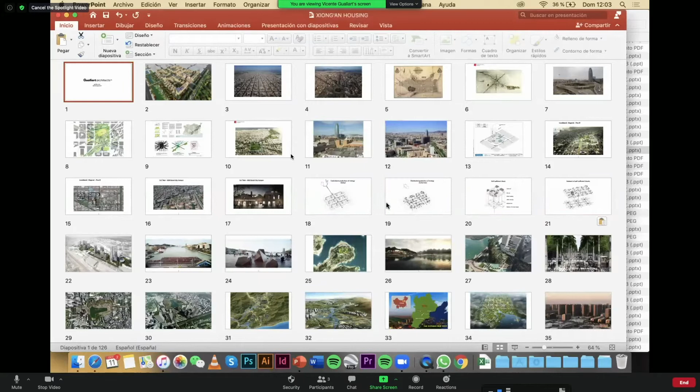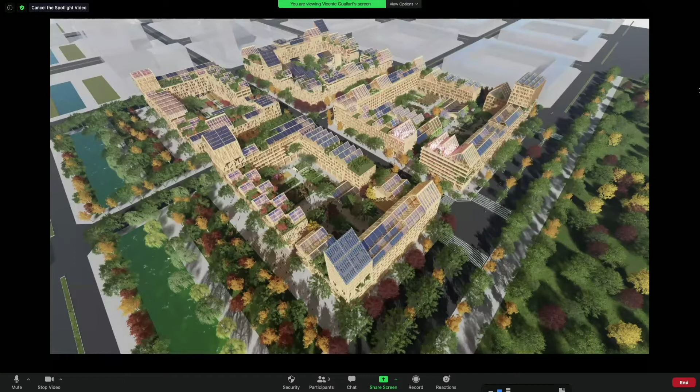Okay, so I will start with my presentation. My name is Vicente Guallart. I am the founder of Guallart Architects, and recently we won a competition in China in order to develop self-sufficient housing. I have been working in China in the last year in several projects, and I would like to do a short introduction to explain how this idea of this project came about, because this project is not something that just appeared because of the pandemic and the different conditions, but we have been working for a long time developing these kind of ideas.

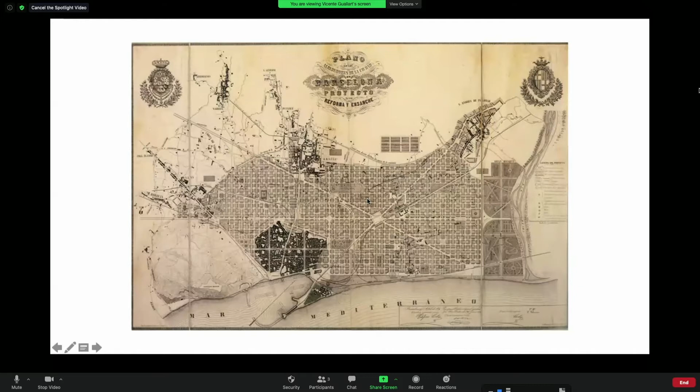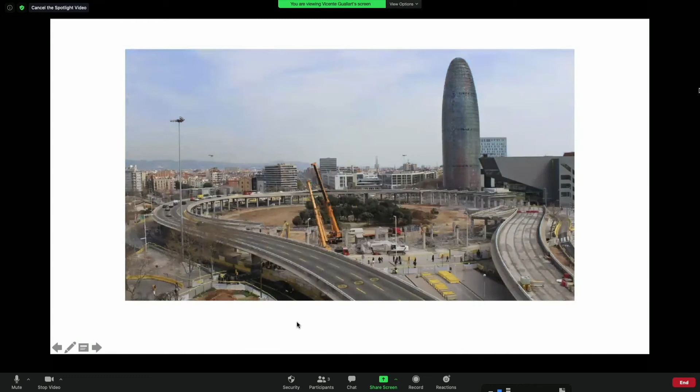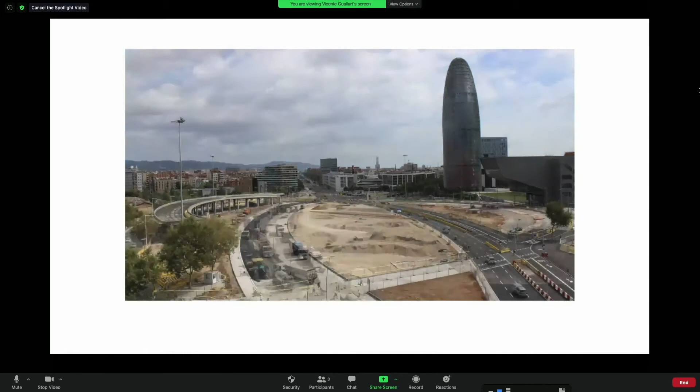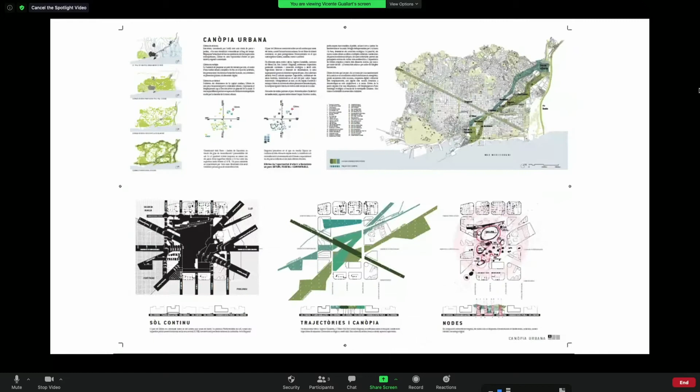The first thing I would like to share is that I was chief architect of the city of Barcelona for four years. During this period we were working on doing an upgrade of the city and developing what we call the renaturalization. For example, we had still some infrastructures from the end of the 20th century, like highways even in the city center, that are displaced in the city. Part of my work was to define new ecological principles for it. But more than this, we were literally demolishing some of these infrastructures from the late 20th century. So that means we know we live in a world that needs to finish the process of urbanization from the modern times, with the idea of the city for the car and so on. In places like Barcelona, in my previous work, we invested a huge amount of effort to do real, specific projects, like demolishing a highway and placing a park in the city center.

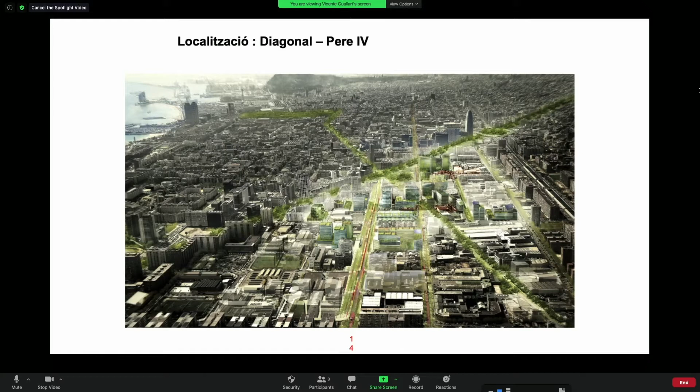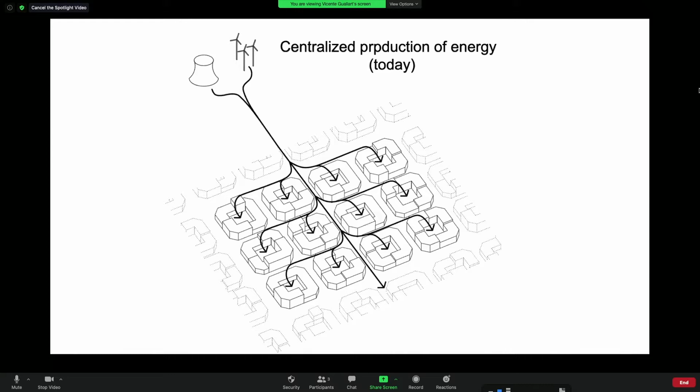Other projects we were doing were related to the new technological district called 22@, creating new campuses where we could merge information technology with new ecological principles. As part of my work, I was proposing this idea, in fact 10 years ago, that today we live in a world where we receive products from outside the city and consume them in the city. So we still have this centralized production system for energy, but also food and so many things. The city of the future should be something different.

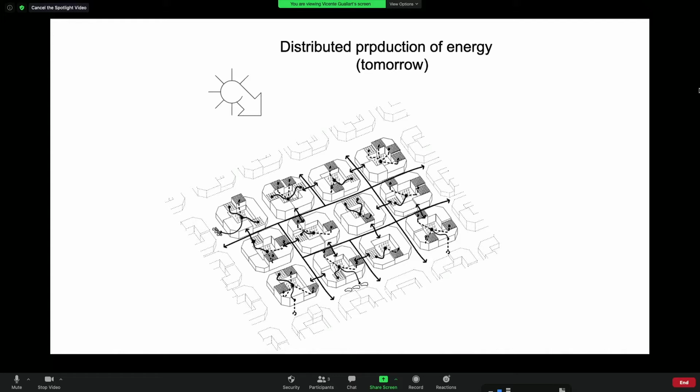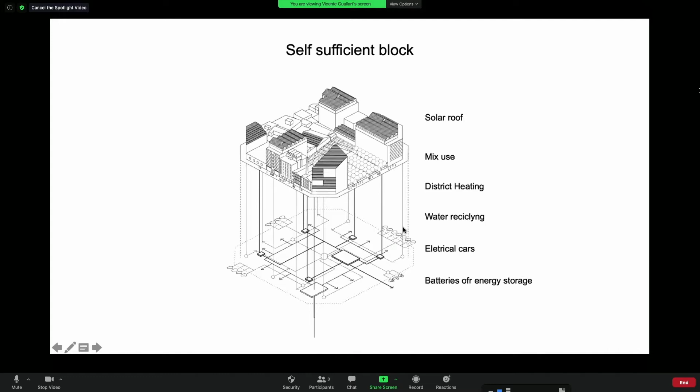The city of the future should produce their own energy. Right now, with the new statement from the European Commission that by 2050 Europe should be a zero emissions continent, the first place where we should start this process is the cities themselves. So we need to transform our cities. This is the first drawing: 10 years ago we were starting to plan greenhouses on top of existing buildings in the city, charging electrical cars with the energy produced by solar panels, and introducing this new layer of data and metabolic systems in parallel to the physical structure of our cities.

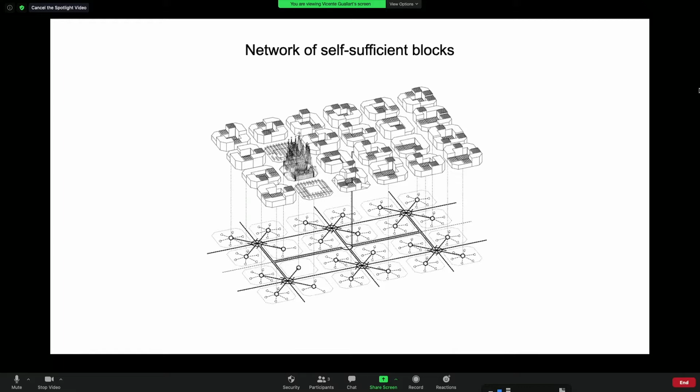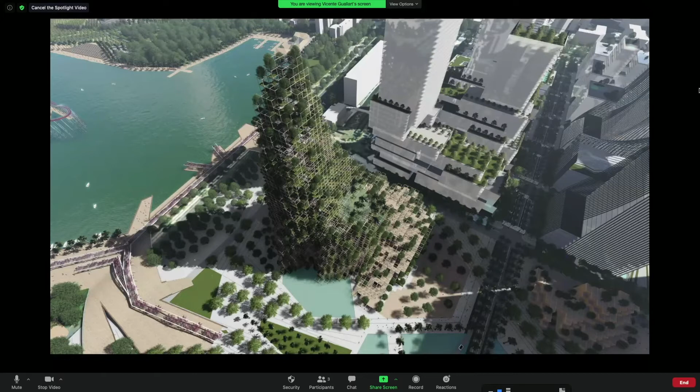This one I won two years ago, a competition in Shenzhen, trying to introduce new ecological principles, but in this case at the urban scale, with a much bigger scale. In this case in Shenzhen it was more about a new CBD, a central business district.

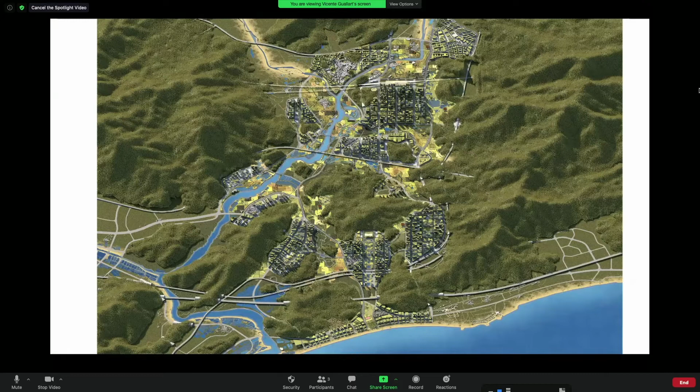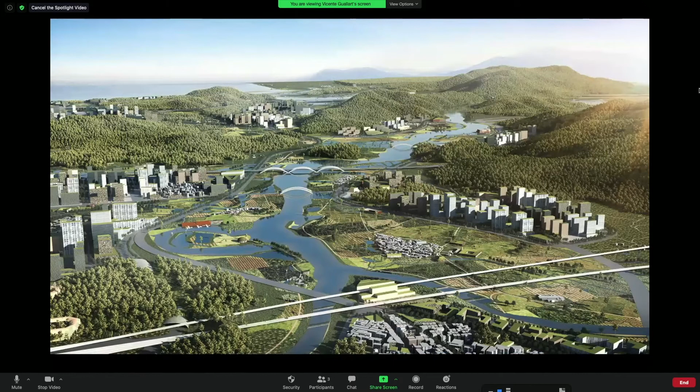In China, they are still in a huge process of urbanization. This is another competition where we won second prize, creating a new district in Shenzhen for 1.5 million people. We proposed very dense areas in the territory, along with a lot of green areas, using the river as an element that could structure the territory.

I already had some experience in China, but we knew in January that the Chinese government was launching a new competition because they are building a new city in Xiong'an. This is south of Beijing, about 100 kilometers south, and they want to create a kind of economic triangle with Tianjin, the harbor of Beijing, the capital, and this new district that should allow them to decentralize some services from the city.

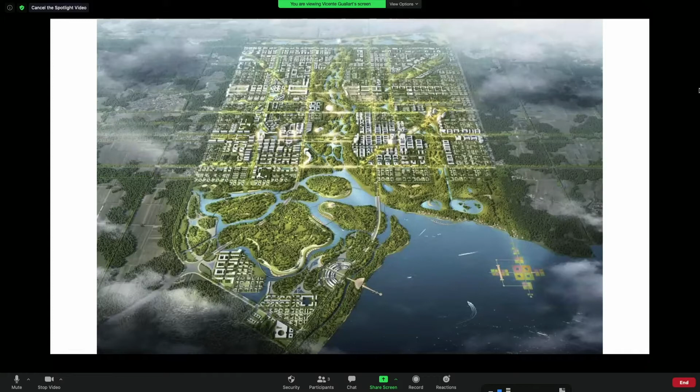They are still following the principles of modern urban planning, where we have residential neighborhoods, industrial areas, and office neighborhoods. That means people are always moving from one side of the city to the other, because the principles of modern planning were based on this idea of specialization and urban segregation.

In Xiong'an, they were proposing an urbanism more like the European style, or European systems, with a compact and dense grid, in this case with a lot of green space, but also including mixed-use principles in this development.

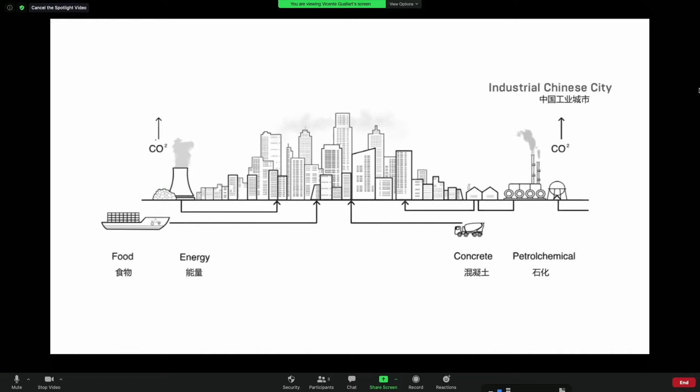I think we are really at the very end, or should be at the very end, of this industrial city model. The new ecological principles for new cities should relate to the idea of biocities - cities that promote life, that build continuity with nature, that produce food in or around the city, that absorb CO2 instead of emitting it, and that use wood as an important construction material, because with forest management you can use wood as material for construction.

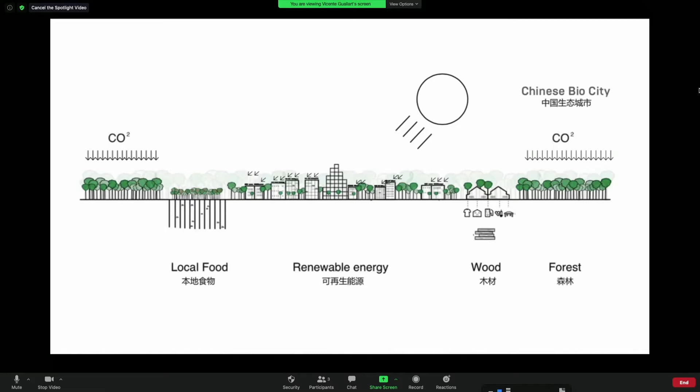These are some principles we have been working with in recent years. Another important principle we use in our projects is moving from this large-scale centralized model to a distributed model.

The centralized model is well represented in a city like Moscow, but also Paris, where there is a very rich center and poorer suburbs - la banlieue - with some social segregation between the center and the periphery.

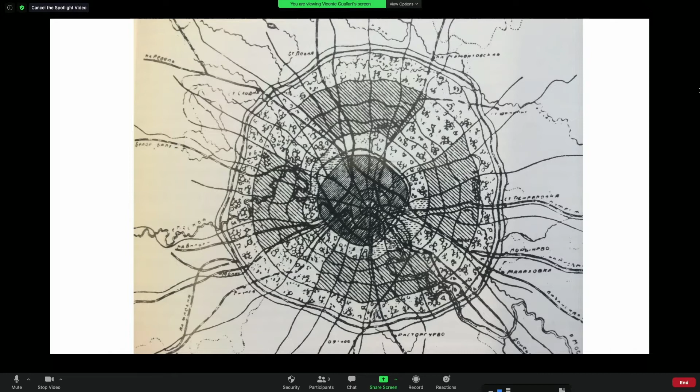The model we have been working on in Barcelona is this distributed model, where instead of thinking of the city as one big element that keeps growing and growing, the city is organized by a group of cells, each one kilometer in diameter.

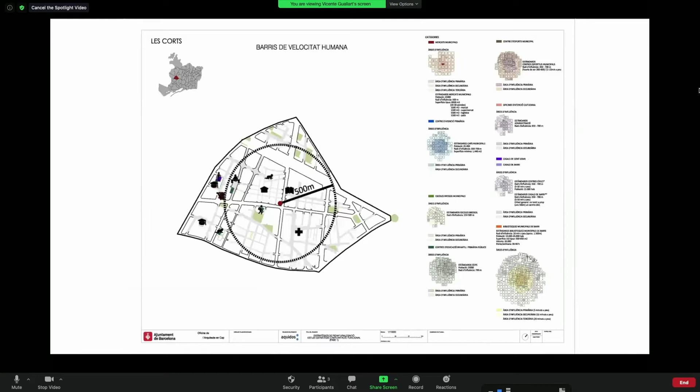This is the diagram with the 500 meter radius model, where people should find all activities connected with public facilities like markets, health, and education. Recently the city of Paris also launched a program called the City of 15 Minutes, with the same idea - having neighborhoods where you can find all these activities inside them.

About mixed use in China, I'd like to explain that they only make housing yellow - for the Chinese, housing means family housing looking south. So all housing in China is oriented north-south.

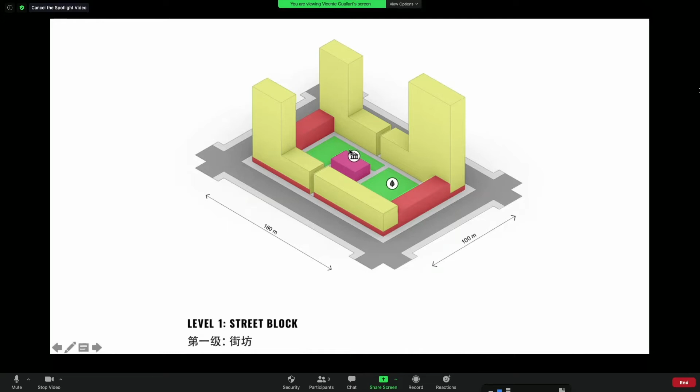That's why for them, when they have a square or rectangular block, it means on the east-west side they can have offices, hotels, or student residences, but they will never build family housing facing east-west. So the block, different from Europe, has to develop mixed use by introducing, for example, public facilities in the center of the block.

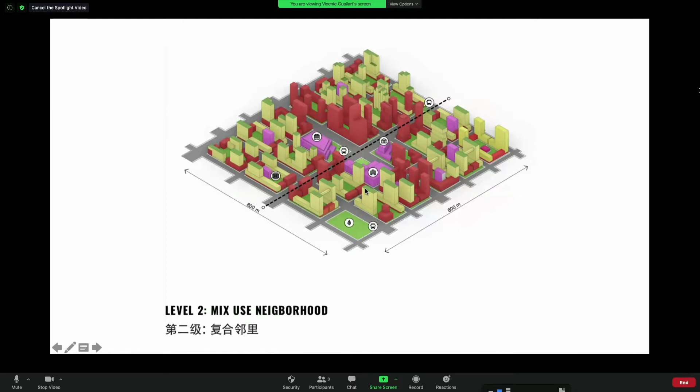They also play with the idea of scalability - if you have a block like this, you can develop a mixed-use neighborhood, and you can develop an urban district also like this. So if you are able to do one block that is mixed-use, you can do the whole district like mixed-use.

Now I will go directly to the block, to the competition that we did. The government launched 6 simultaneous competitions about different topics for this new city: one related to office buildings, another to public facilities, and another to housing. That's why we chose to work with housing, and they offered us 4 blocks with this orientation, north-south.

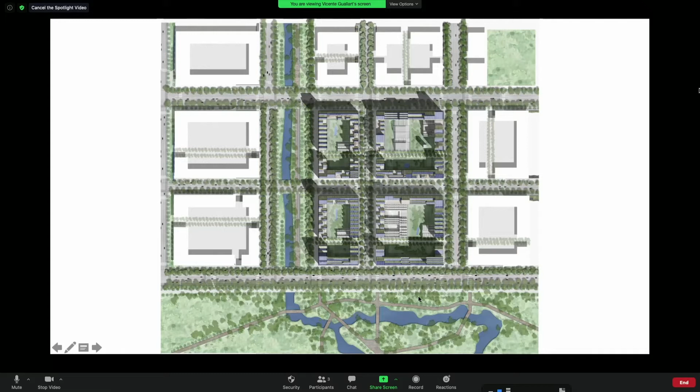Our first idea was to think about how people live, not only in their home, but at least 3 scales: the home, the building, and the neighborhood. Citizens don't live only in our apartment, but we have a relation with the building and the neighborhood. Thinking on these mixed-use functions, and also the pandemic situation or potential future crises, we thought we should organize very clearly these 3 scales.

In fact, we were developing this competition during lockdown. We were in China in February when they started lockdown in mid-February. In Europe, we started lockdown in mid-March. In Spain, we had a very strong lockdown for 2 months from March to mid-May. So we were experiencing this situation of living in lockdown while thinking about how cities in the future should be.

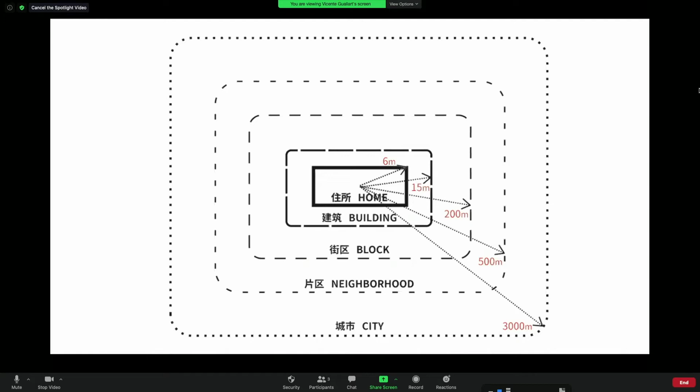Our proposal was based on the principle that we should mix 3 different typologies of buildings: one being the European compact and square blocks, another the high density towers you find in China, and the third - wanting to produce things in the city itself - we introduced greenhouses as part of the design.

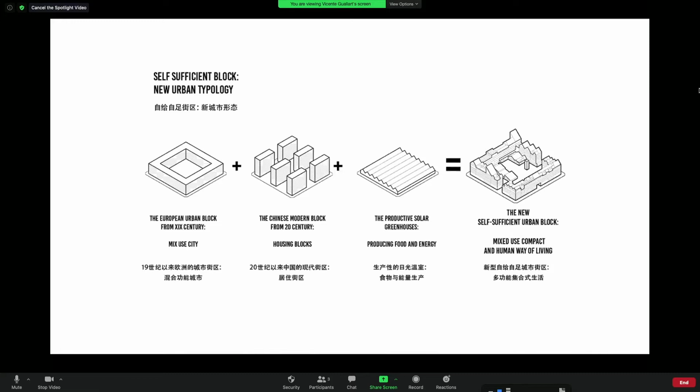The result was a city with a profile that is not like Paris or the center of Barcelona, where there is control of building height. We wanted a broken height system, and at the same time, we wanted all the roofs covered with solar panels, and almost all roofs covered with greenhouses.

This is the result of the 4 blocks, where there were also some courtyards with public facilities. They were asking for a kindergarten, a fireman station, a government center, a small center, and we included a swimming pool and other public services.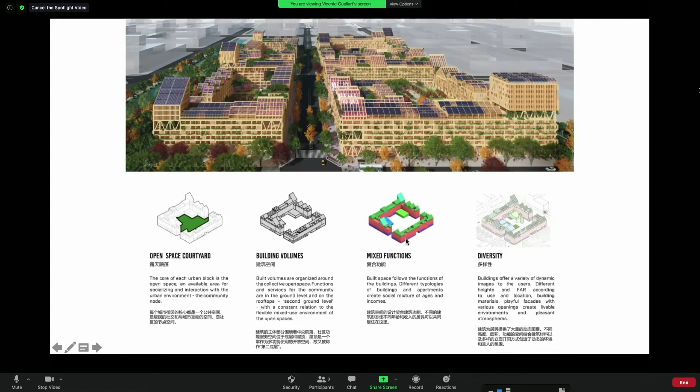That's why we were defining this mixed use, happening both in plan and in section. The first thing was related to slow mobility, the idea that people should be able to walk. In this model of the 15-minute city, the idea is that we should walk to work, walk to buy food or go to other places we need daily.

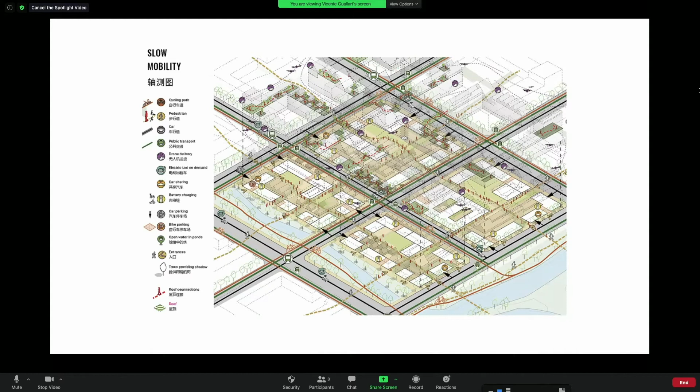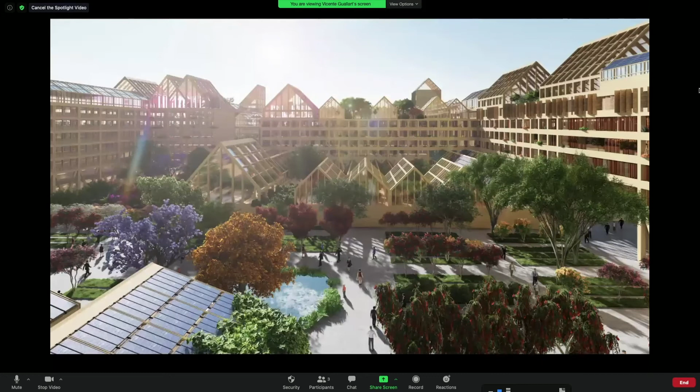If we look at the past, this is exactly how cities were 100 years ago, before cars existed, when people used trams and mostly walked. That means the city of the future should learn from elements and situations that already existed in the past. In our project, we developed a big courtyard where people could access the school, the market, and the swimming pool by walking, and this was an important topic in our project.

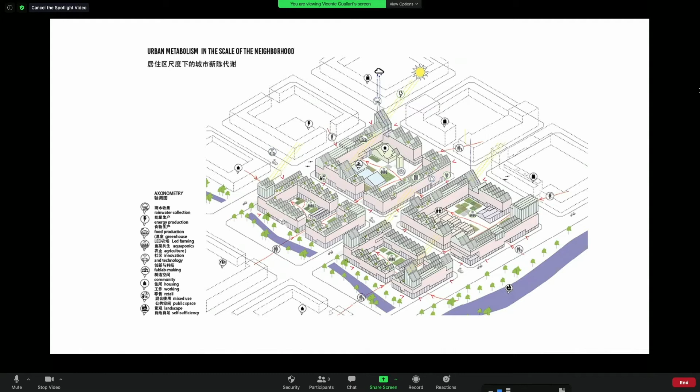Another important topic is the idea of urban metabolism—the idea that buildings should not only consume resources but should produce them. Buildings should produce their own energy and use it to make light, but also to charge electrical cars. So adding a metabolic layer to the buildings and blocks is a fundamental topic for the city of today.

This is one diagram explaining all the layers that exist in cities. We wanted to introduce new principles using telecommunication networks, water recycling systems, energy self-sufficiency, and the production of food, using slow mobility as part of the design of our city.

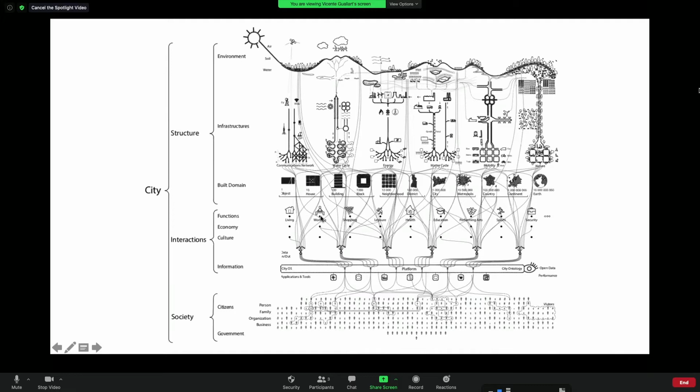We proposed creating applications not to connect to Facebook or to people around the world, but to connect to your neighborhood and create platforms for sharing products and elements. We were also dealing with zero waste and the circular economy, proposing to reuse waste—you will see this now in different ways.

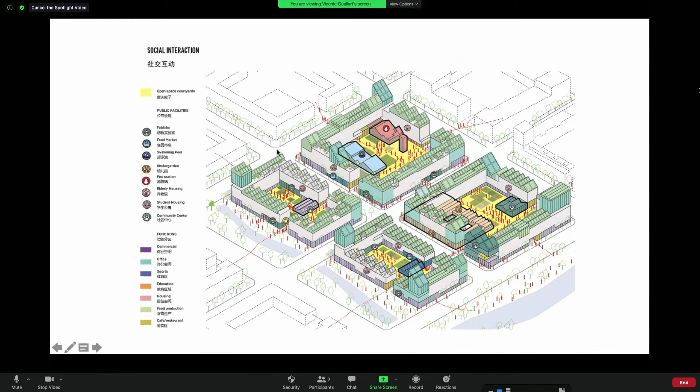We propose that these blocks have different public facilities. This was like 400 by 400 meters, so it's not yet one of those 1-kilometer by 1-kilometer neighborhoods that could represent the city of 15 minutes. So here we might not have a school or a health center, but we have some of the public facilities that are part of this 15-minute city.

Another important topic is that we were working with timber to develop our buildings, because timber is the material of construction for the near future. Now in Europe there is an explosion of projects using timber, basically because timber has captured CO2 inside it. So when you make a building of timber, rather than producing CO2, you are creating a structure that has already absorbed CO2.

Now, using cross-laminated timber, the so-called CLT, we can develop many new kinds of construction. In Barcelona, we are developing many of these.

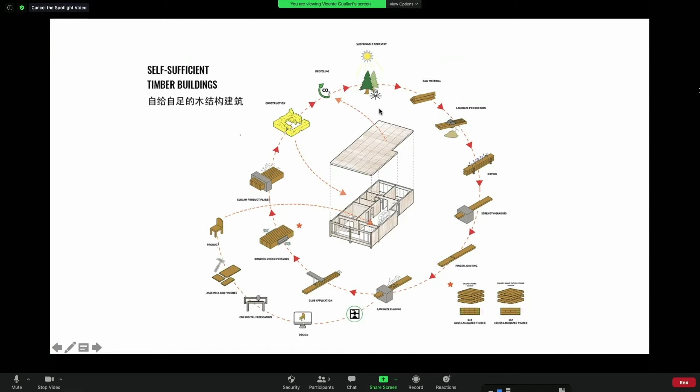In China, they are not yet working with this technology, and we are discussing with the government how we could work with some companies from Austria, Germany, and France that are already working on that. If China decides to start working with timber, they will do it for sure—there will be some leaders—but obviously they need to take care of managing the forests around the world in a sustainable way.

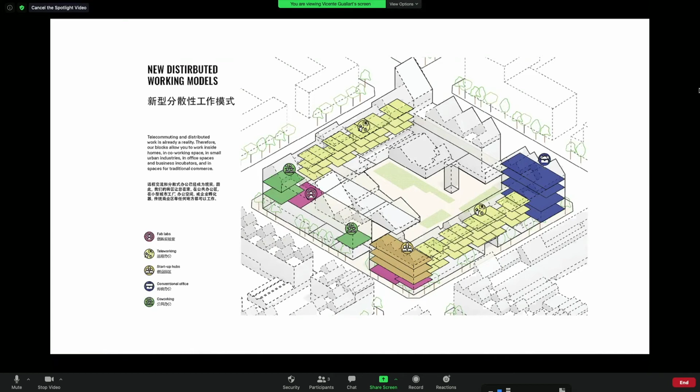Another important topic is mixed use—we propose that in the section of every block we should have apartments in the middle, a space for working and shopping on the ground floor. This is not very usual in China, but we were also proposing spaces for digital fabrication on the ground floor. And in the roof we could have greenhouses to produce energy and food on top of every building.

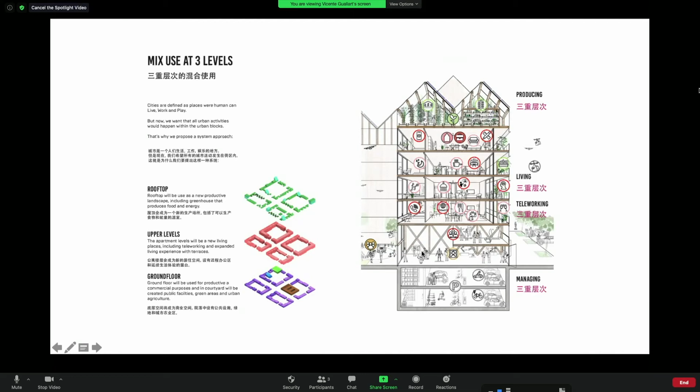Also in this section, what we propose is that if we produce energy, we can use it or store it in the cars of the buildings, or even in batteries. The water will be recycled using gray water to irrigate the garden, or even part of the agriculture on top. And to manage all of this, there will be a digital application allowing management of the building, and also connection with other people living in the neighborhood.

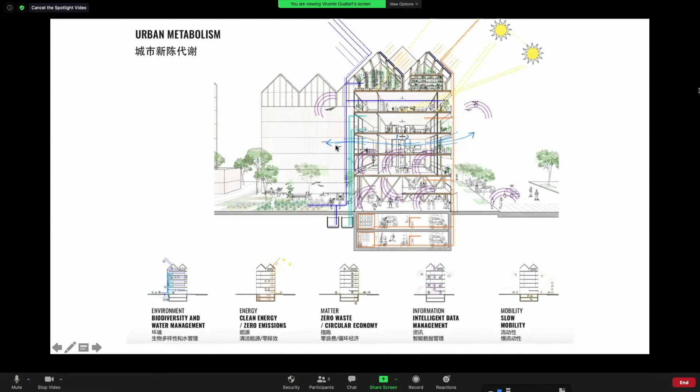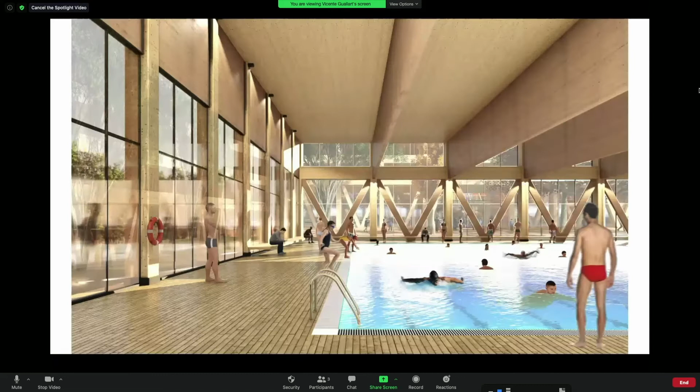These are the plans of the blocks, which are very simple and traditional, an elemental plan with the square and the big courtyard in the center. This is the swimming pool in the center, and the courtyard also had agriculture and a space for a playground for kids.

About food production, we propose that we should produce food, energy, and things in our neighborhood in order to move towards self-sufficiency. There are several ways to produce food in buildings, and in cities there are basically six ways to do that: vertical farming, greenhouse on the rooftop, street trees, LED farming.

And trees in the street. So from that point of view, we were applying many different approaches in a very integrated way in order to be able to produce 40% of the vegetables that the people need to live.

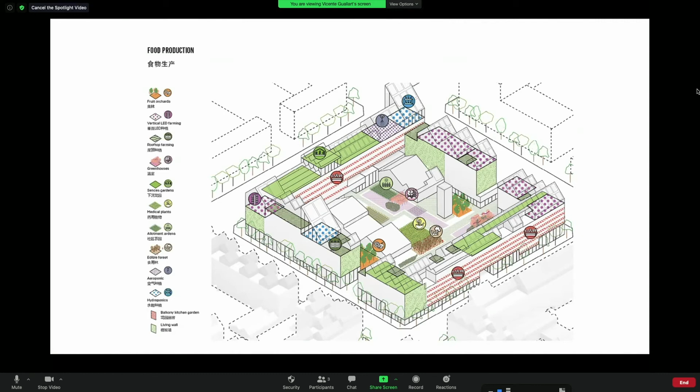Obviously it's difficult to produce all the food inside the cities, and we don't want to produce things related with animals inside the cities, but we can produce a lot of elements from ecological farming inside the cities, and this is what we propose here. Having control of your food production would also be good in case of other forms of crisis we may have in the future.

So we propose, as you see here, to have the greenhouses on top. This greenhouse should have about 70% PV coverage looking to the south, but the north would be without coverage.

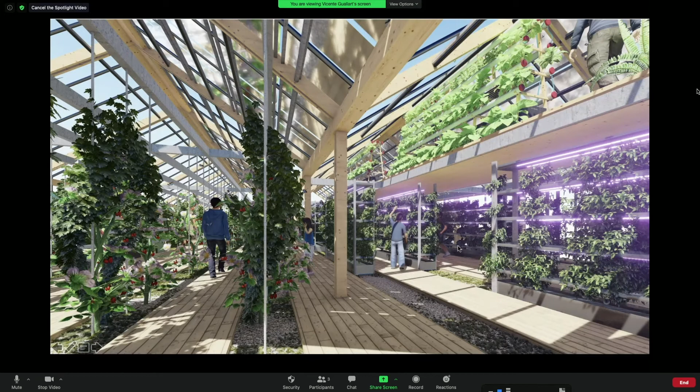You see here, with this structure we were producing many different vegetables. In principle we propose to use natural light, and also have some areas, in this case a mezzanine, with LED farming. You will see some images right now.

And in Iceland, they produce in 1 hectare 30% of the tomatoes needed for 300,000 people. That means they have created the knowledge of the technology of using greenhouses to produce food.

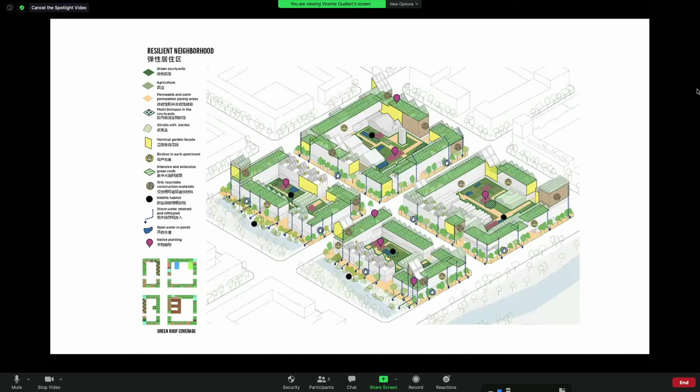This is the section of the upper part. And then if we produce food in the rooftop, we can also have a food market on the ground floor, and also some restaurants with ecological food, etc.

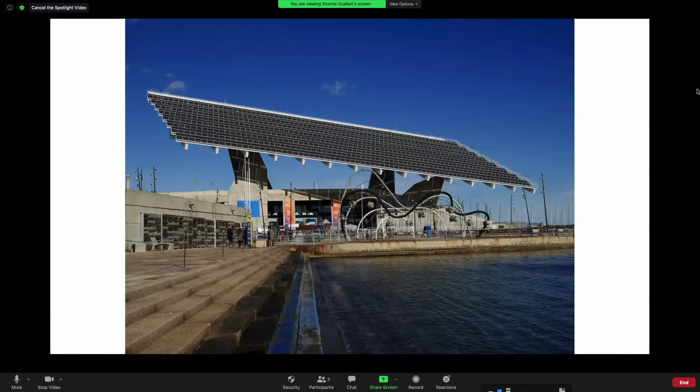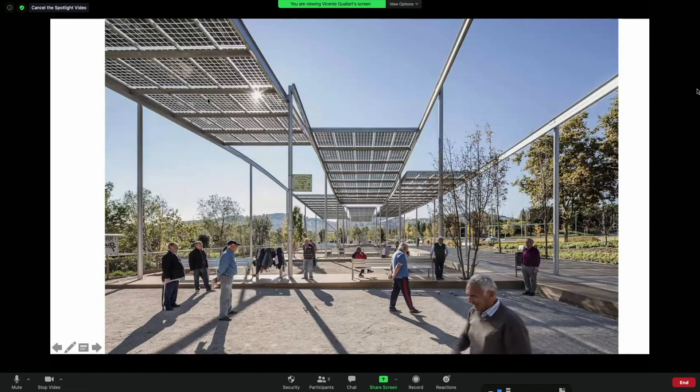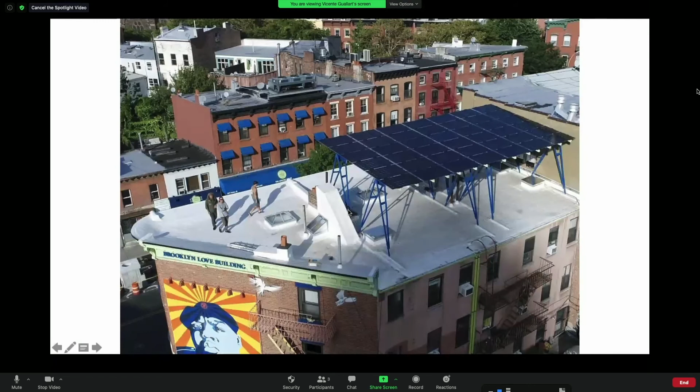Another topic is energy, and again, in many cities in Europe they are producing energy. This is a big solar structure we have in Barcelona, and we also have pergolas with solar panels in the public space. But in Brooklyn, they have produced this very beautiful structure on the rooftop of one small building, and they say if we are able to do one, we can do many.

That's why we imagine we could have a huge amount of energy production, but not only with a pergola, but with systems integrated into the buildings themselves - sometimes on top of greenhouses, sometimes on top of villas, and sometimes on top of office buildings in the corner. The third topic is to produce things.

We are working more and more using digital fabrication, in this case using small robots, 3D printers, laser cutters, and so on. Our idea is that we should also produce some of these elements on the ground floor of the building.

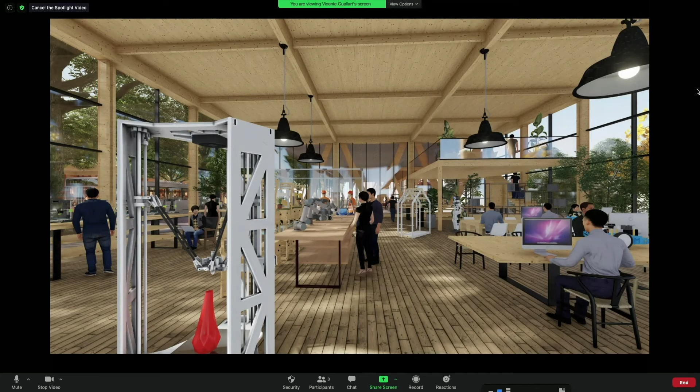In Spain, while the government was trying to buy masks from China, makers were producing face coverings, which during the first weeks of the pandemic was fundamental to saving lives. So we wanted to introduce laboratory fabrication on the ground floor of our building as a fundamental part of local economic development in this neighborhood.

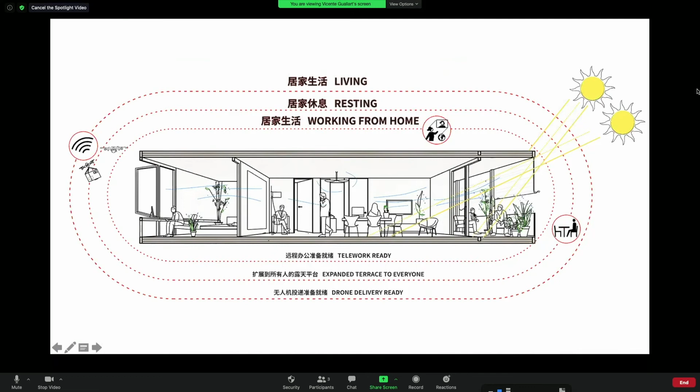The last thing is the apartments. We thought we should develop this idea of the extended apartment where people can live and work, but we also propose big terraces where we could have sun, and we follow the principles of the passive house.

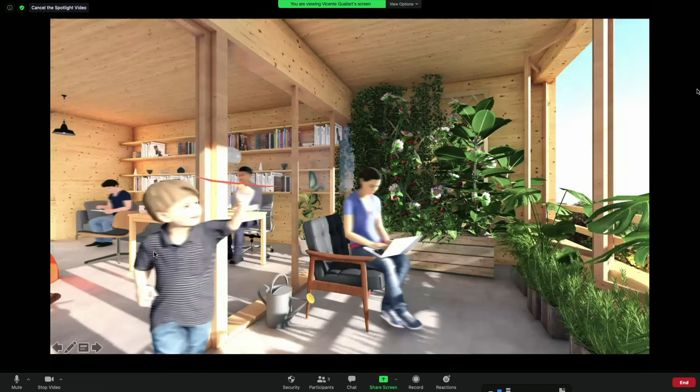If you have these greenhouses facing south, you can collect heat during the winter, and this can save a lot of energy in the building. In summer, you can open up and have these terraces where people can play - kids can play, adults can work.

And this is what I am doing right now, talking from somewhere, and this can be done also from the terraces.

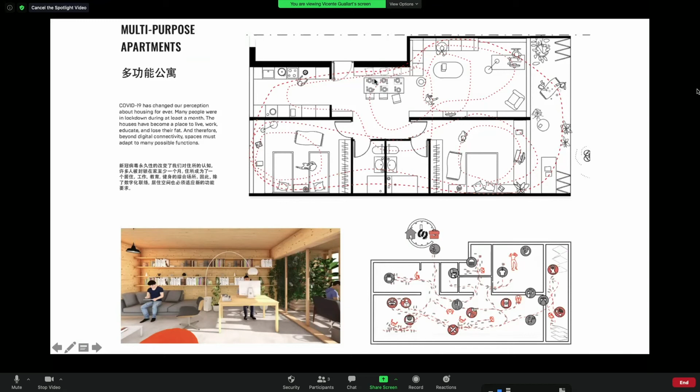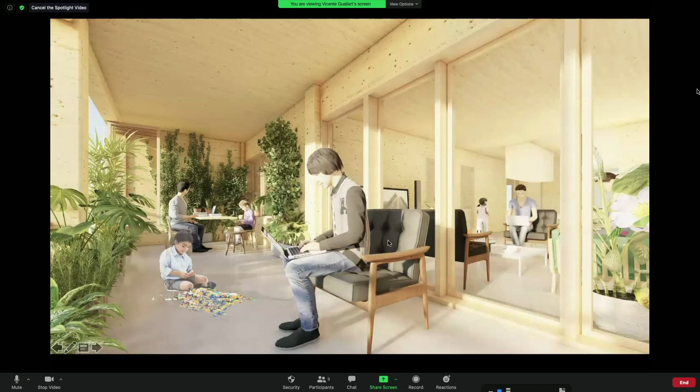In China, they have very few typologies, so we proposed a very Chinese typology with the kitchen, two rooms, and this apartment. But we included the idea of having spaces for working as a fundamental part of the apartment, along with terraces - a big terrace, like 2.5 or 3 meters, in this case by 8 meters - which allows an extension of the house that can be used in many different ways when you live in a family.

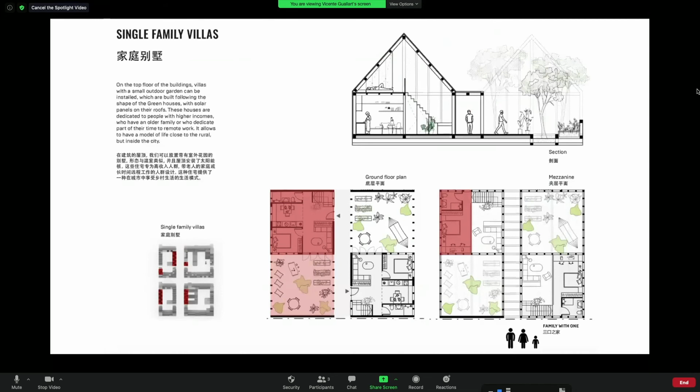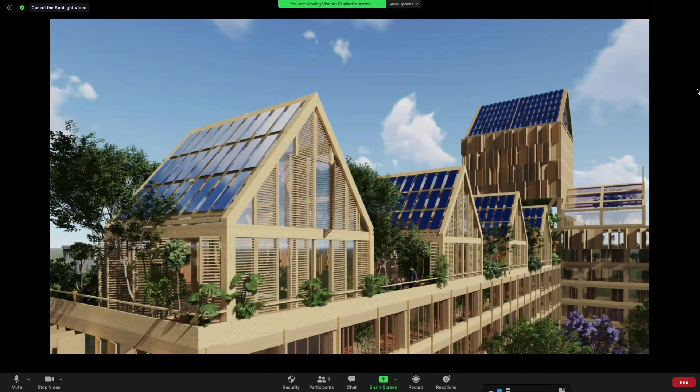We also proposed single family villas on the rooftop. Oriented to the east side of the building, these villas allow more private and different configurations of families, and relation to the community. We also have elderly and youth people apartments, mostly in the linear blocks in the east-west orientation.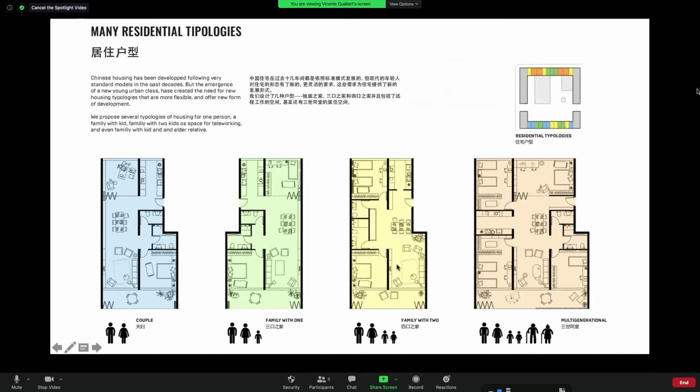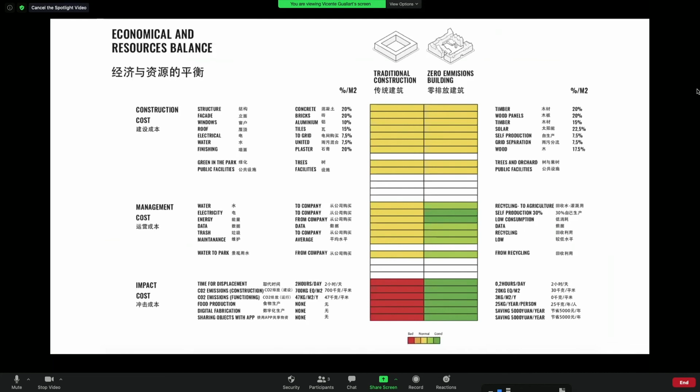But the new developers want to stay - they want to stay to manage the building. They have clients for 50 years, and there are many services to provide. So the idea of housing as a service is a very new, interesting, and important topic for the near future.

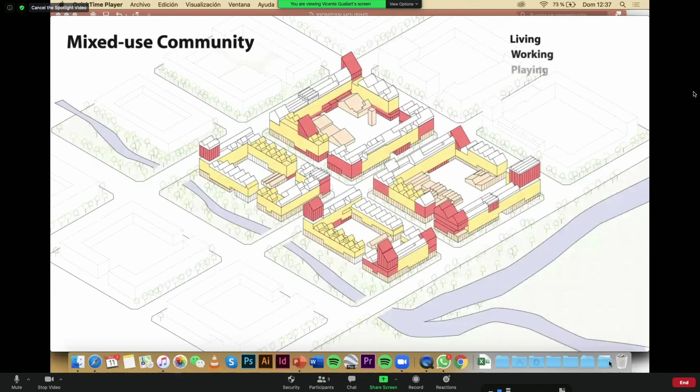I would like to finish my presentation showing a video in animated form showing the images of the projects, where you see what we mentioned about the typology, about the mixed use community, about the slow mobility in the blocks.

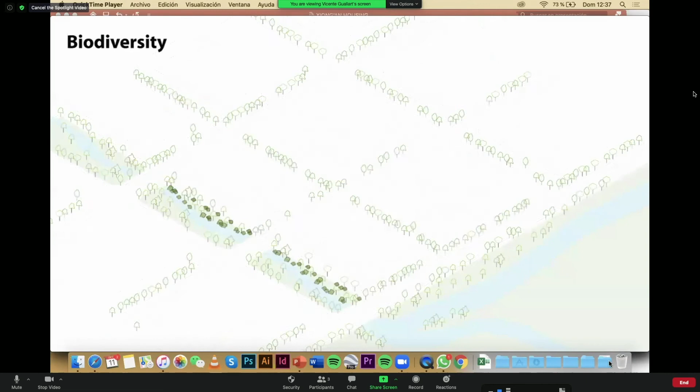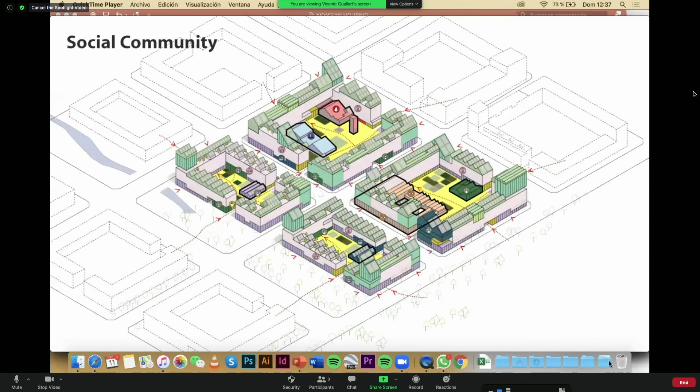Now we are looking at the scale of the blocks, the idea of promoting biodiversity in the blocks themselves, wildlife, and so on. The social community - how we create places for social interaction - and also how we use technologies, 5G and others, in order to promote this interaction.

The result in this case is 4 blocks, but these principles could be extended to the whole city, and in fact to almost any city in the world. You see that courtyards are something in Europe we used to do very well, with the green, and we are doing fewer and fewer courtyards.

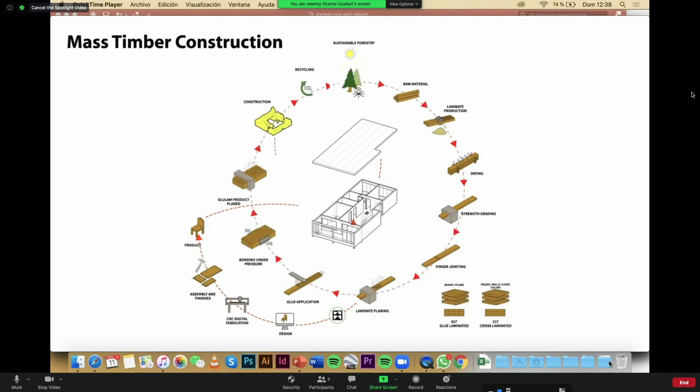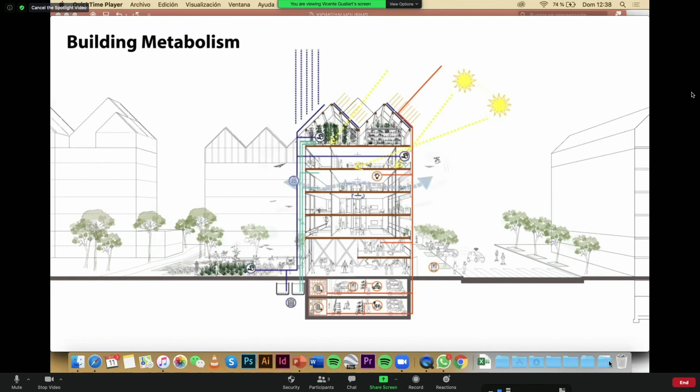For me, one fundamental principle is this: if we don't start to make cities that are more productive, more dynamic, more beautiful, people will be interested to leave the cities. Cities need to be the place for innovation, the place where new ideas are happening, and these new ideas should be developed by the community or at the urban scale.

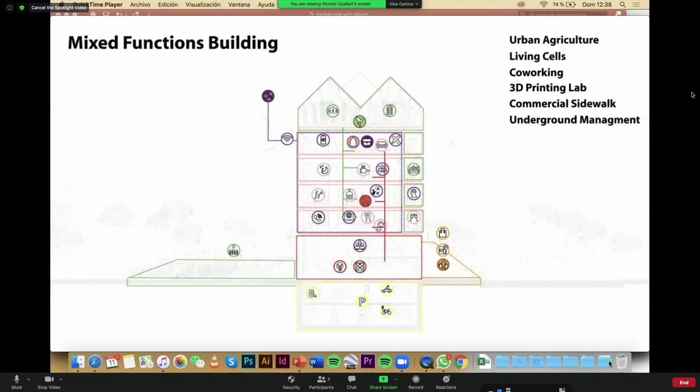That's why it's very important for us to work at this urban scale, because if we are not able to answer from the cities and from the community scale to these pandemic situations, then rich people will be interested to leave the cities, finding that the city is a place for problems. The city is not a place for problems, it's a place for solutions, a place where we could have a more efficient life and a more social life.

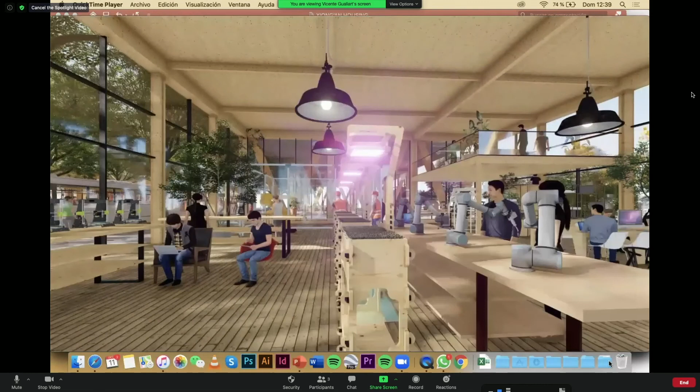This is the ground floor with the digital fabrication facilities, the swimming pool. Then the bioclimatic extended home with the cross ventilation, the light, the multi-purpose home, also with these villas on top, with the facade and the terraces.

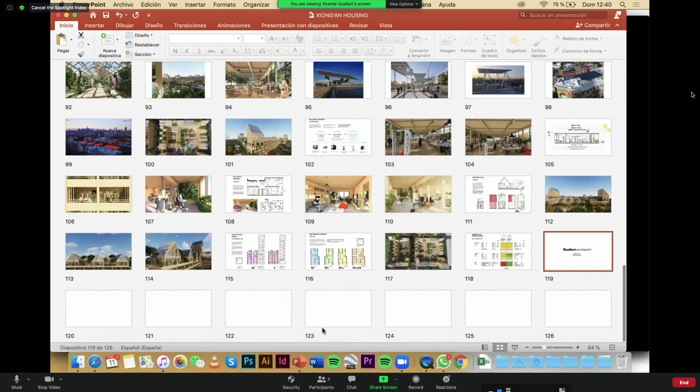We have been contacted by people from several parts of the world who are interested to develop projects similar to this, and we'll be more than happy to develop these ideas anywhere. I think Europe is a perfect place for these ideas to happen, and if anyone wants to contact us, they can find us through the website. So thank you very much.